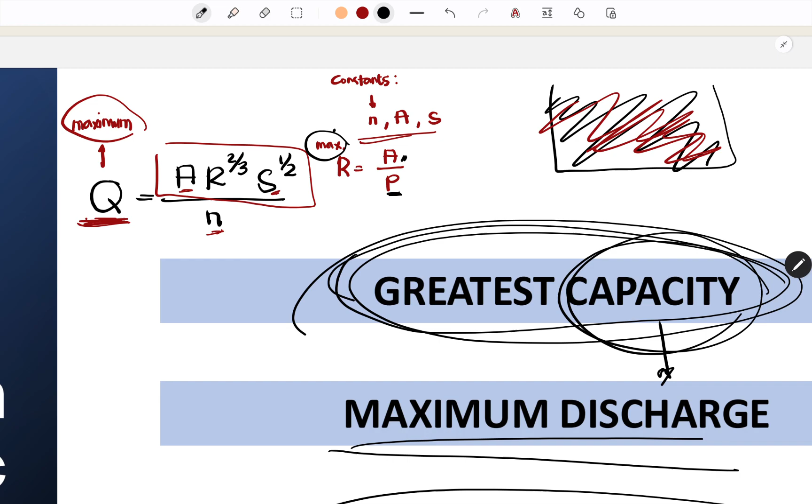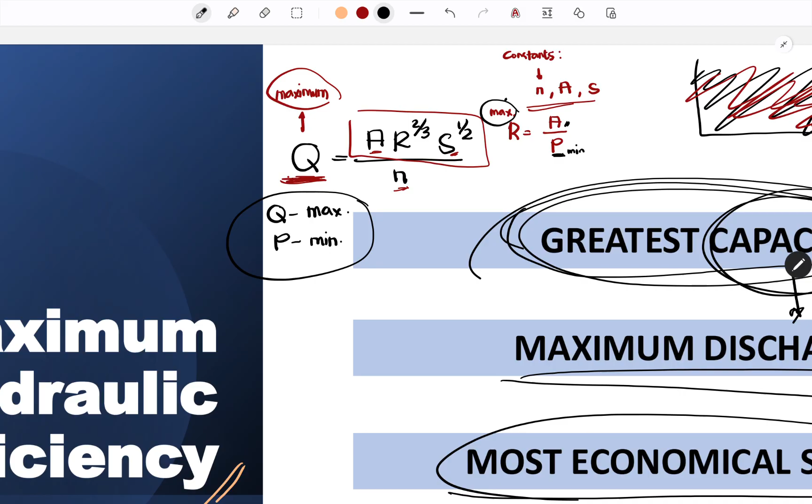Ayan yung very important part dito, na dapat yung perimeter, kung ito maximum, sabi ko nga, inversely proportional, ito naman is minimum. So, sa efficient sections, ang tatandaan lang natin, yung Q is maximum, and then yung perimeter is minimum. So, ito lang po yung tatandaan nyo dyan para sa ating efficient sections.

So, every shape ng ating channels may different efficient sections na pwede natin ma-derive from the equation. So, yan. Screenshot. Okay, next. Let's proceed with the rectangular section.

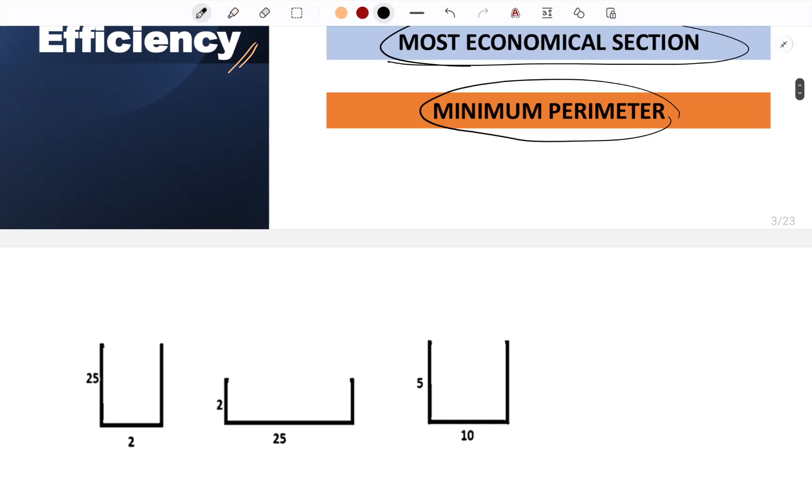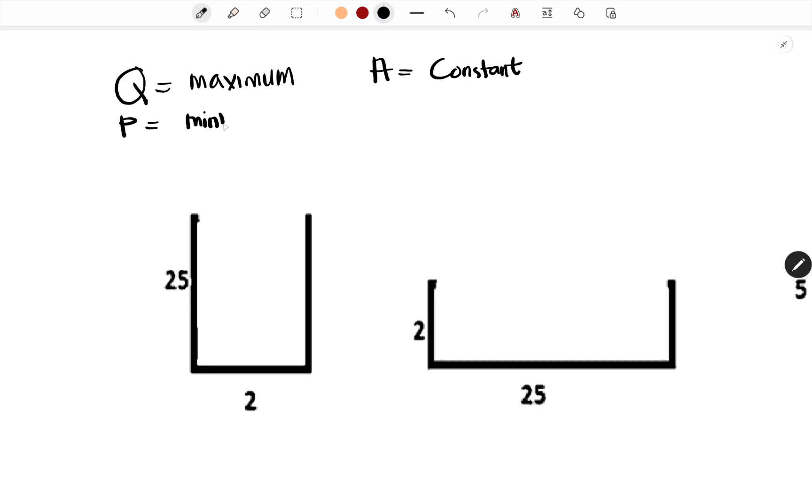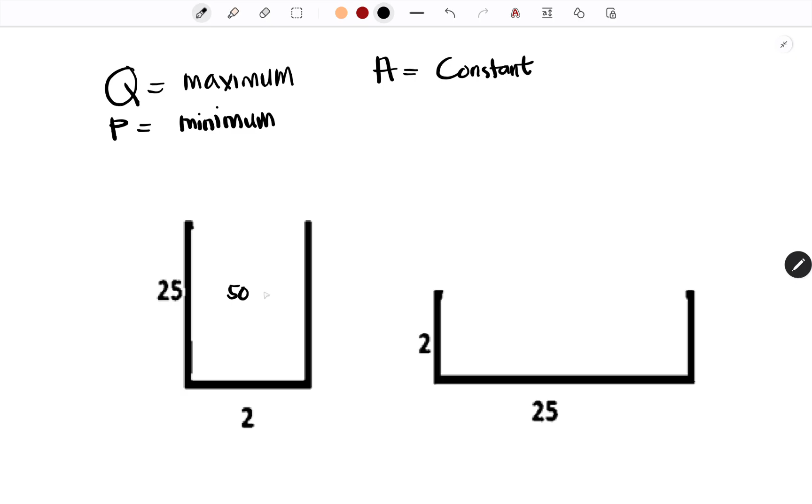So, ang sabi ko kanina, yung Q is maximum. And then, yung area is constant. But yung P is minimum. So, in this case, meron tayong dalawang example ng rectangular section na merong parehas na area since constant. So, 25 times 2, we have 50. Area of 50, let's say square meter.

So, ma-observe nyo, yung width niya dito, yung B, ito naman yung D, is 2. And yung depth niya dito is 25. So, ibig sabihin, yung area niya is 50 parehas. Pero, sabi ko nga, dapat yung Q is maximum, and then yung P is minimum. So, let's proceed first with the perimeter.

So, in this case, alin dito yung most efficient section? Papapiliin kayo, siyempre, pipiliin nyo yung minimum na P. So, i-compute muna natin. Ano yung P dito? So, yung P is 2D plus B. Ito yung P, or perimeter. So, yung 2D, we have 2 times 25, plus 2. So, this is equivalent to 52.

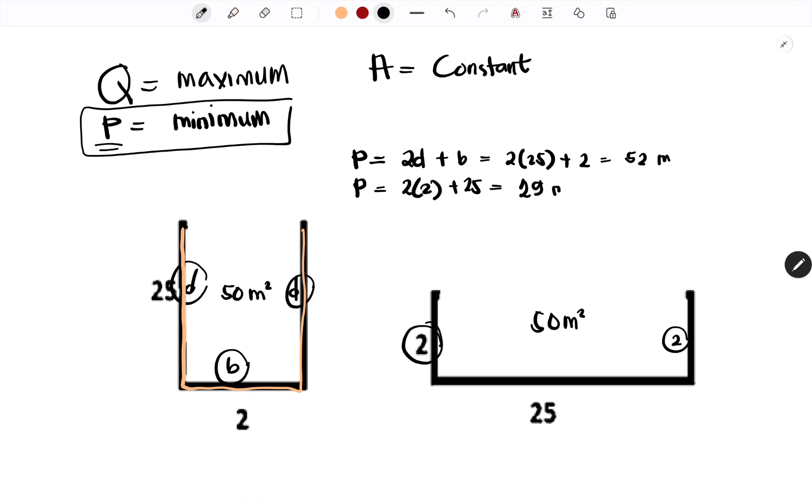Meters. Ito naman, i-solve natin para sa pangalawang P. So, meron kayong 2D, 2 times 2 plus 25. 25 plus 4, 29 meters. So, ang pagkakaiba, parehas yung area, but yung perimeter is naka-minimum. So, kung papapiliin tayo kung alin yung most efficient or most economical section, ang pipiliin po natin is ito, kasi ayan yung mas kaunting perimeter, 29 lang.

So, ibig sabihin, kung maglalatag na ng hollow blocks, naglalagay dyan ng hollow blocks, mas kaunti o mas mababa lang yung perimeter niya compared dito na mas mataas. So, yan yung pagkakaiba ng dalawa. So, of course, dito naman,

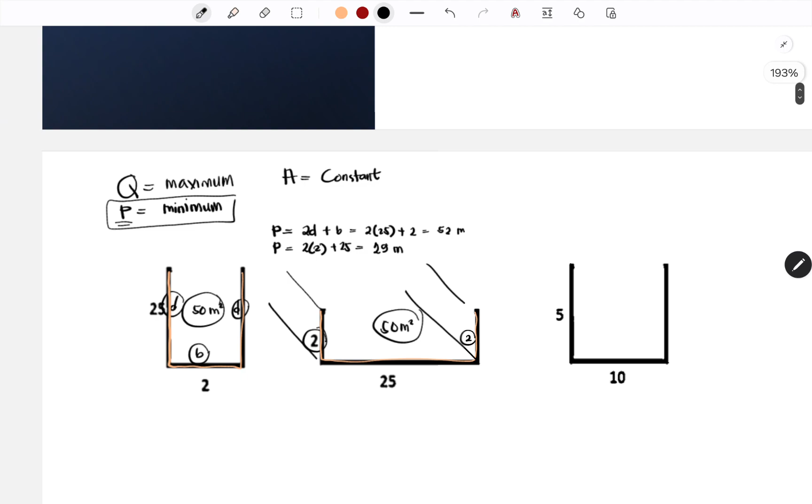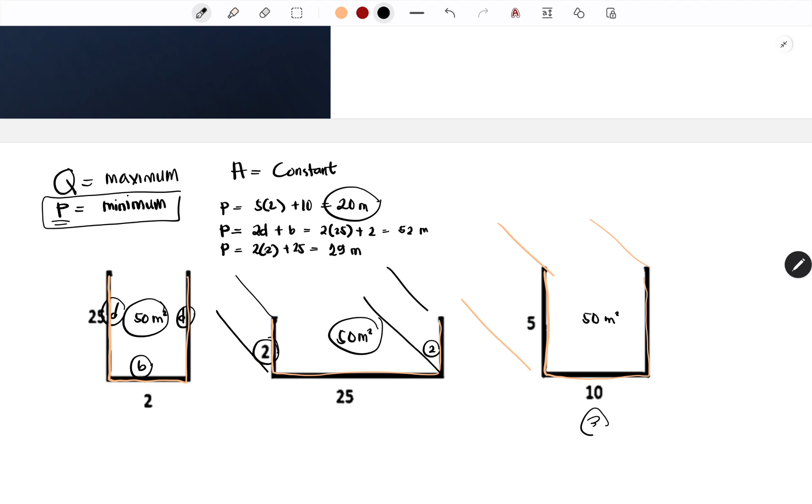ito pa pala, 5 times 10 is 50. Kalimutan ko ito. So, isa pa pala, P, 2 times 5 plus 10. So, 10 plus 10, 20. Ito pala nanalo. So, kung pagbabasehan natin yung minimum perimeter, yung pangatlo yung most efficient. I'm very sorry.

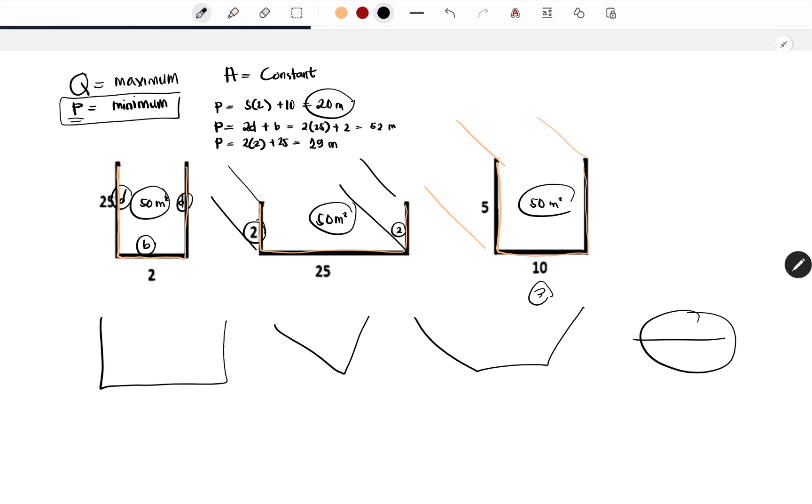So, every shape, meron tayong different efficient sections. Meron tayong apat na shape na i-consider dito: rectangular, triangular, trapezoidal, and then circle or semicircle. Ang gagawin natin, mag-derive tayo ng mga equation, and of course, ipapakita na natin yung mga equations. So, first, para sa rectangular cross-section,

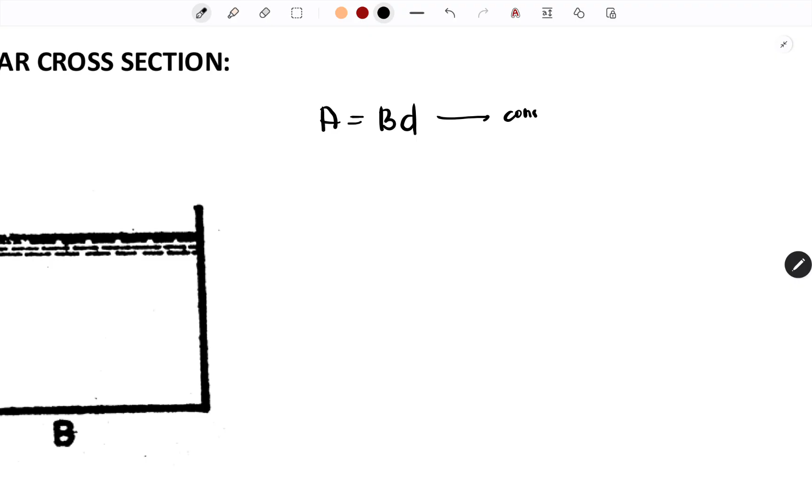sa area ng cross-section na to, we have area is equal to B times D. Pero, in our case, this is constant. So, let's try to put the equation of the perimeter. For the perimeter naman, meron tayong B plus 2D. Ito naman is dapat minimum.

So, we will apply the concept sa calculus, yung maxima and minima concept, na i-differentiate natin, tapos equate natin to 0 para makuha natin yung minimum value. Since this is the minimum, ito naman constant, ito po yung i-differentiate natin. Isang differentiation lang, tapos yung ibang shape, ibibigay ko na yung value ng minimum perimeter or hydraulic radius. Sa rectangular lang, para ma-familiarize ulit kayo. Ito yung gagamitin natin para sa maxima minima.

Ang mangyayari kasi, dalawa yung magiging variables nyo kung mag-differentiate kayo agad dito. So, gagamitin natin tong formula. Yung A is equal to BD. Kukunin natin yung value ng B na naka-in-term sa D and A. So, the B is equivalent to A over D. Yan po yung ilalagay natin dito.

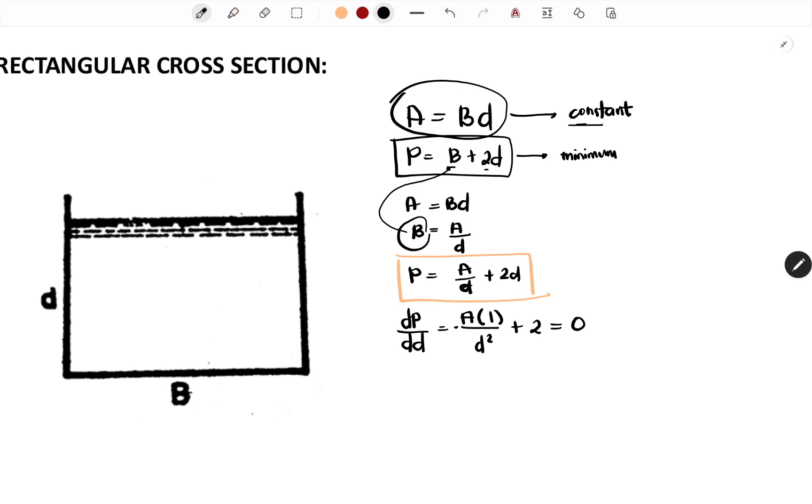So, since meron na kayong equation na to, ang gagawin natin is ililipat lang natin tong part na to dito. So, we have 2 is equivalent to A over D squared, since yung minus magiging positive. So, with that, try natin makuha yung area. Lipat natin dito sa taas. So, A is equivalent to 2D squared.

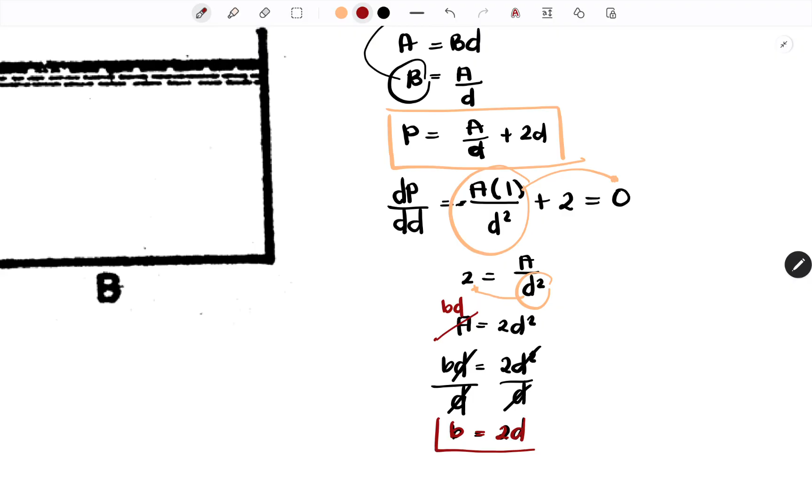And we know A is equivalent to BD. So, yung BD is equivalent to 2D squared. And then, divide both sides by D. So, B is equivalent to 2D. So, yan na yung magiging equation natin para makuha natin yung most efficient section. B is equal to 2D. So, i-substitute natin sa R.

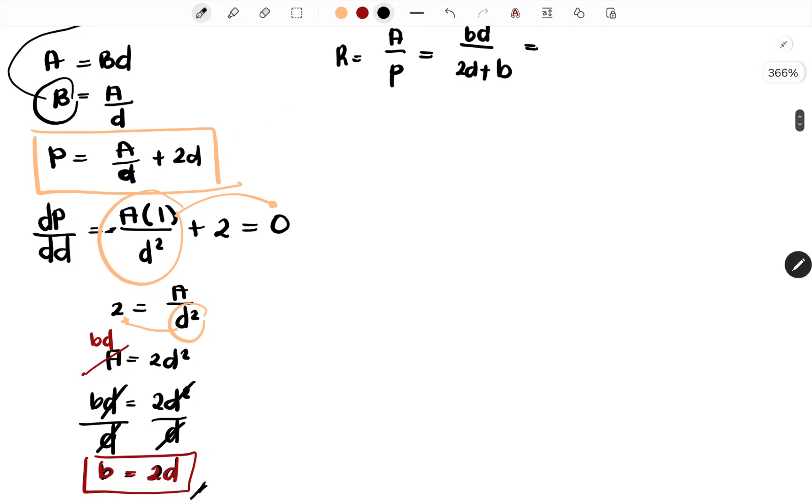So, para sa R naman, we have area over P. So, for the area, we have B times D. Yung P naman is 2D plus B. So, we know na yung B is equivalent to 2D, no? So, ilagay natin as 2D. Yung B na sinasabi ko, ito na yan. So, ilagay ko ulit as red.

2D times D over 2D plus 2D. So, 2D squared over 2D plus 2D, 4D. So, cancel natin yung dalawang D, pati yung 4 tsaka 2. Mangyayari is D over 2. So, this will be the value of the hydraulic radius kapag tinatanong yung efficient section. Diba? So, yan.

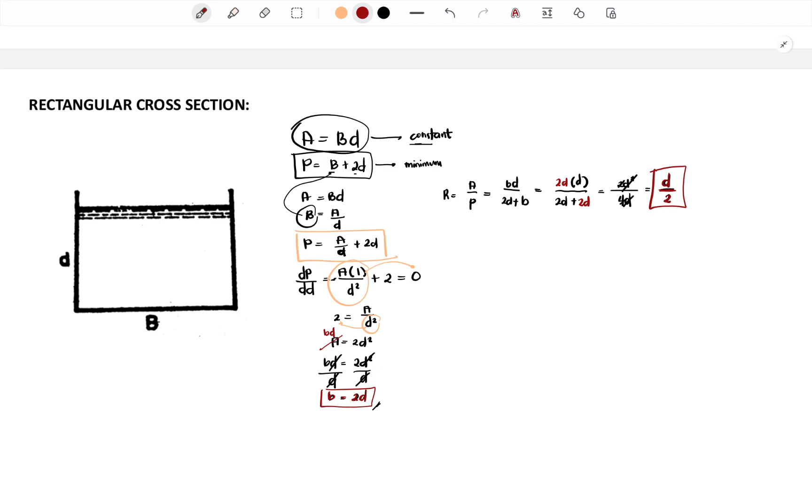So, let's start with the example. Though, naka-English unit to. So, pwede na yan. Parehas lang naman. Mababago lang yung equation natin sa Manning's. So, let's proceed.

Design the economical section of a rectangular flume. Yung flume pala is an example of open channel. That will carry the discharge of 100 cubic feet per second with an allowable drop of 4 feet per mile. So, yung allowable drop is the slope, no? 4 feet per mile daw yung slope natin. So, convert natin yung 4 feet per mile.

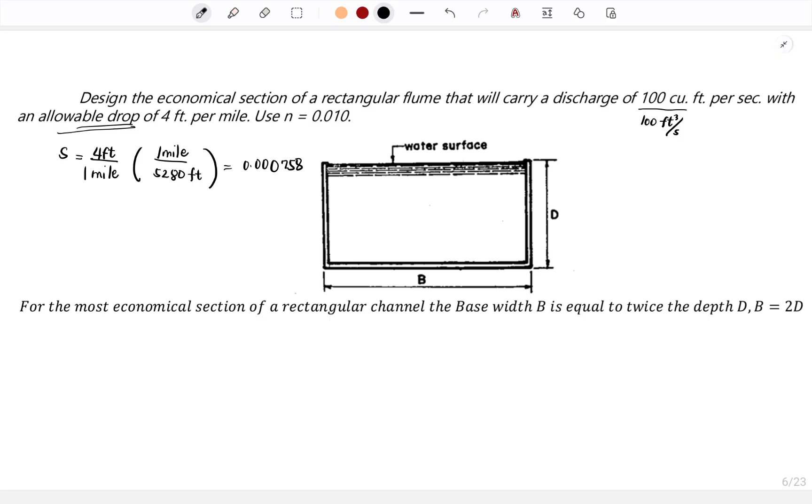Per 1 mile. So, yung 1 mile, merong ilang feet? Convert nyo na lang, 5280. Lalabas dyan sa calculators nyo. So, we can solve 4 divided by 5280, we have 0.000758. Yan yung magiging S. And then use N as 0.010.

So for the most economical section of a rectangular channel, the base width B is equal to twice the depth, or B is equal to 2D, which we derived kanina. So in this case, the area is B times D. Since B is equal to 2D, 2D times D, so magiging 2D squared. Next, perimeter.

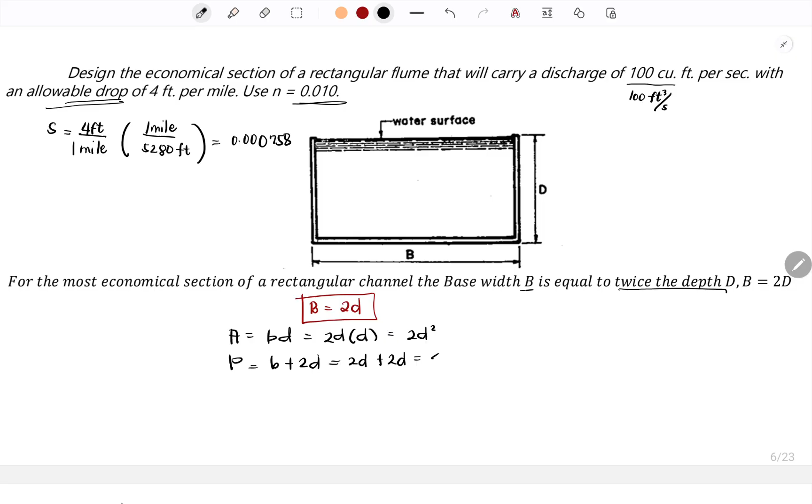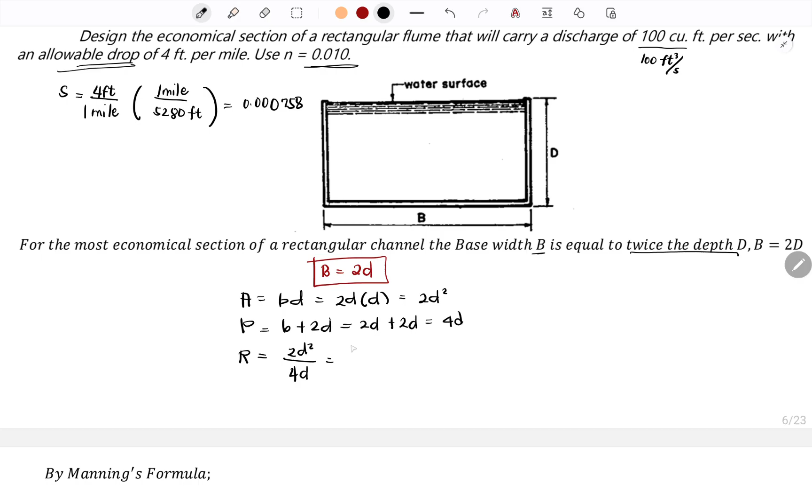B plus 2D is equal to 2D plus 2D. So we have 4D. And then for the hydraulic radius, we have 2D squared divided by 4D. So we have D over 2. Okay? So ito yung mga equation natin. And then for the S, nasolve na natin, 0.000758.

So, yan. By Manning's formula, we know na meron tayong formula of Manning. Dapat familiar na kayo dito. We have Q equals 1.486 over N, times area, R to the 2/3, S to the 1/2.

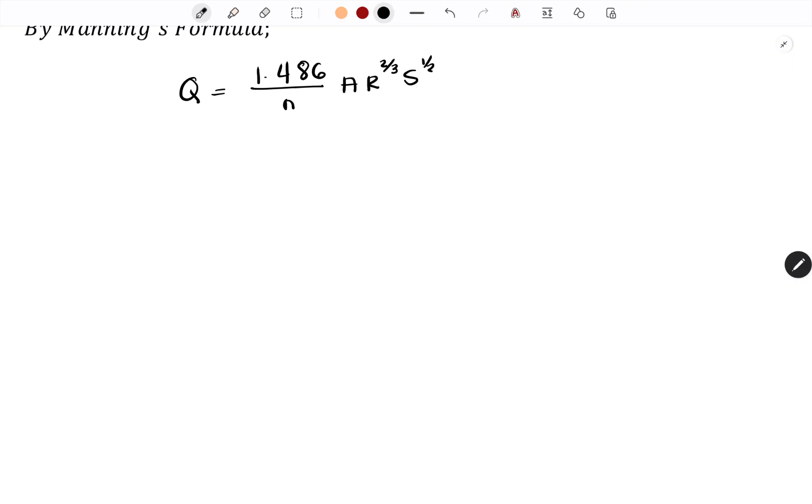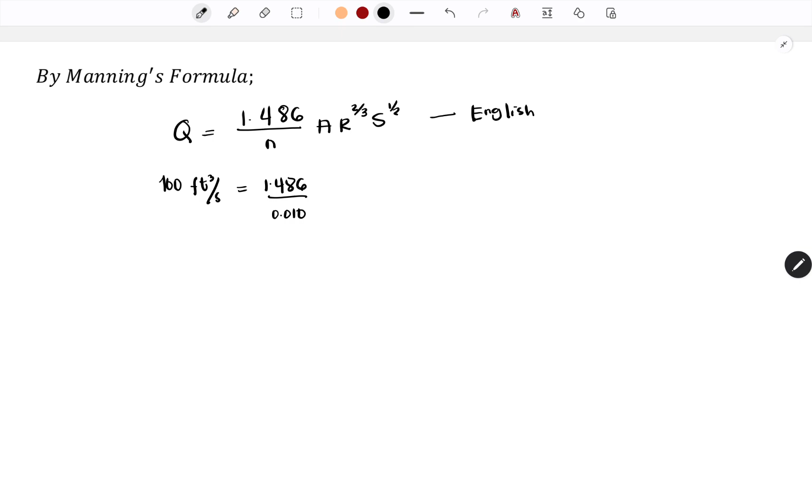So for the Q, naka-feet na to, no? So English na to. So this will be in the English version. For the Q, we have 100 cubic feet per second. And then we can just copy the 1.486. And for the N, we have 0.01. Right? For the area, we solved it earlier. This will be the area.

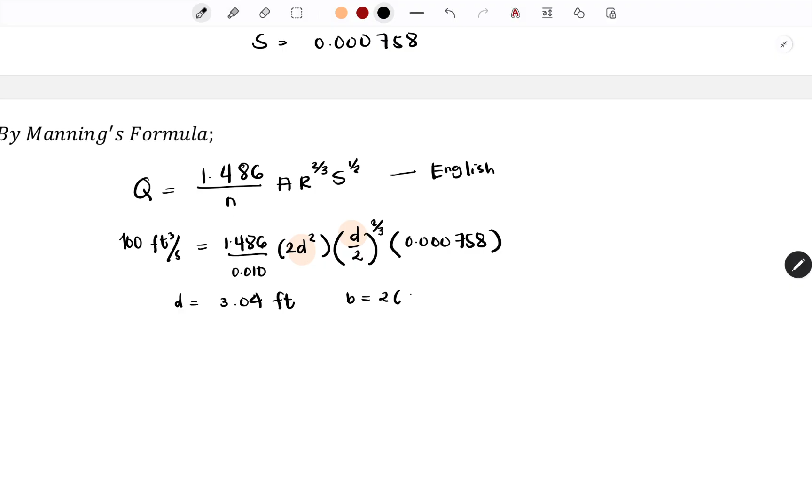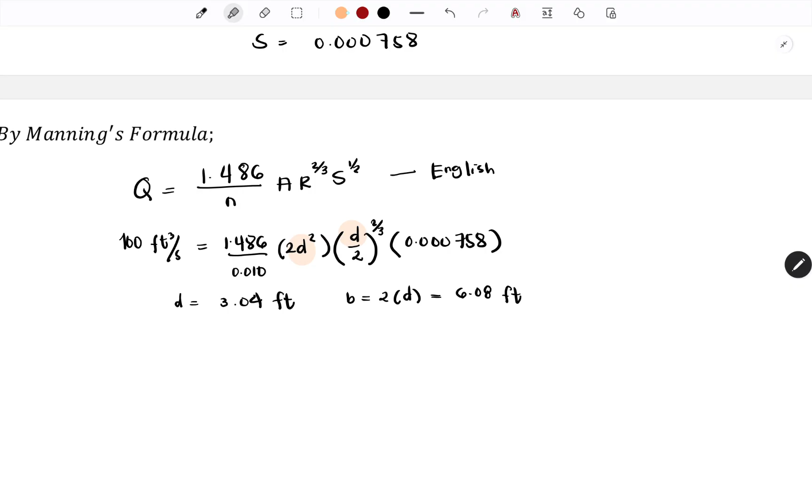So we can get the most efficient section of the flume. Solving, we get D equivalent to 3.04 feet. And then for B, 2 times D, so we have 3.04 times 2, which is 6.08 feet. So that's the answer for problem number 1.

Screenshot this. By the way, we have four shapes, so we will solve all four shapes. I'll give each shape an example.

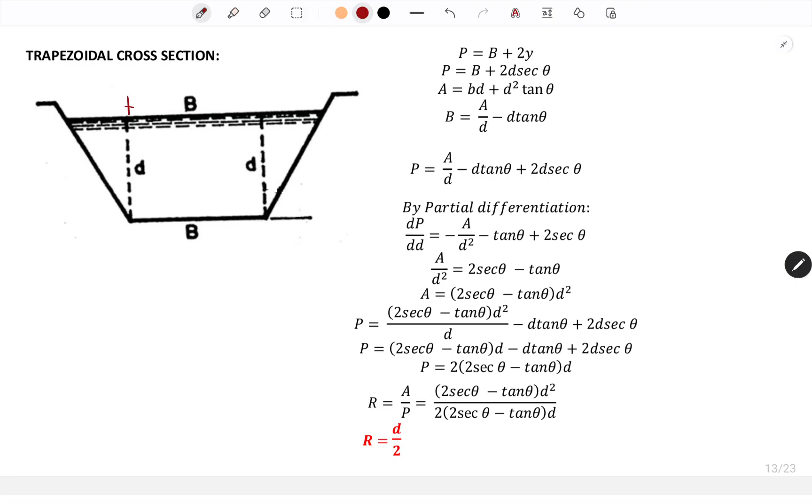Let's continue with the trapezoidal section, let's see the differentiation here. In this section, we have the width base B, same as in the quiz earlier. So we have the width base B, and then this is also B. And then we can call this d.

And then this will be the slope of the cross section, but this is different from the slope in the problem. Let's call this y. Since in the perimeter the equation is in y, and this will be the perimeter, this should be at minimum.

Let's solve for this, going quickly so our discussion moves fast. I will just point out the areas, the perimeters, and the hydraulic radius. For the perimeter, the value of y will be d secant theta, derived from the secant. But you can also solve for this, we have here the angle.

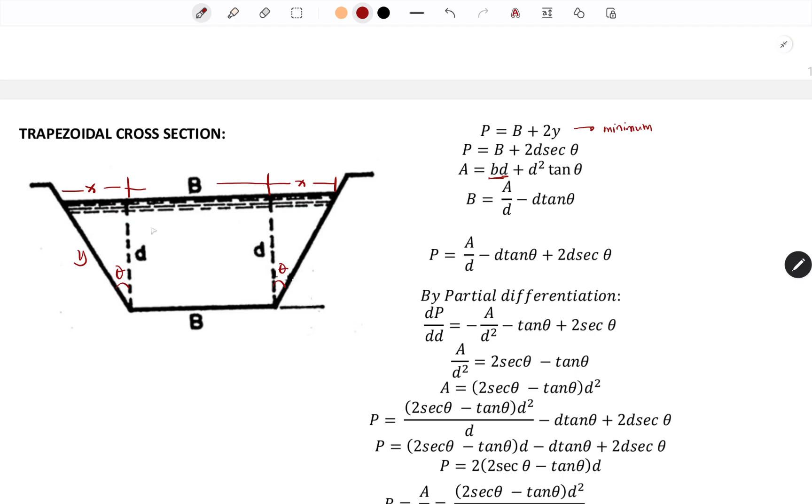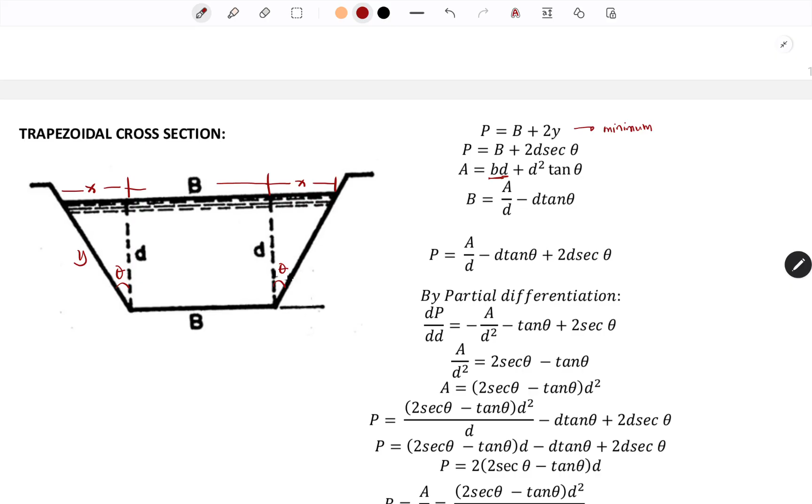So for the area, we have BD, the area of the rectangle, and then the area of the rectangle, a triangle rather. For the perimeter, the B for the rectangular part is taken from A. So this will be the equation AD, A over D minus D tan theta. And then you get the equation of the perimeter AD, etc.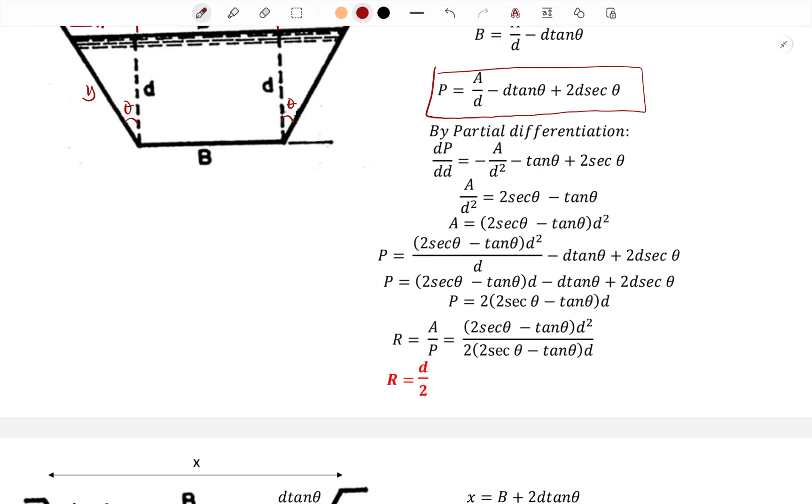By partial differentiation or maxima-minima, that will be used. So this will be the differentiation. Upon differentiation, this will be the equation of the perimeter, derived from this equation, so we won't show it again.

And then we have the hydraulic radius, which is A over P. So A over P, the P is this one here. And the area, since the area has the equation of 2 secant theta minus tangent theta, times d squared, so this will be the area.

So by this, we have the same value here, same function, so these cancel out. Cancelling, what's left is d squared over 2d. So d squared over 2d, cancelling out the d, leaves d over 2. So this will be the equation for the hydraulic radius. That's what you need to remember for the trapezoidal cross section.

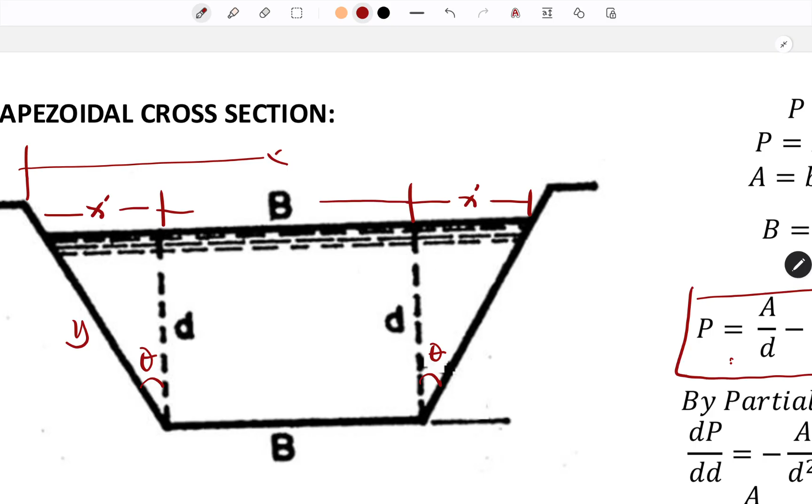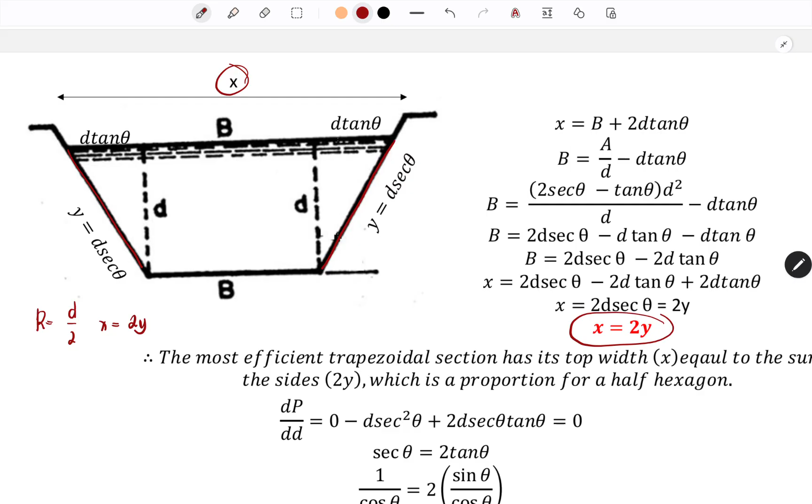So we have R is d over 2. The x, or the total width at the top, is 2y. In this case, this is the conclusion: the most efficient trapezoidal section has its top width equal to the sum of the sides, 2y, which is a proportion for a half hexagon. So a half hexagon is the shape of our cross section. So in other words, this is the trapezoid.

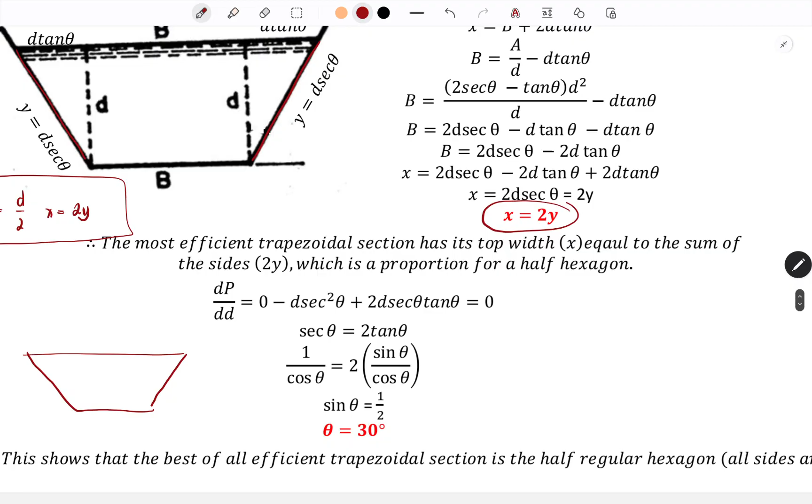And then you can see that the angle is 30 degrees, so yes, all sides are equal, and this is the half regular hexagon. So let's proceed with the example.

So, medyo tiring kasi yung mga differentiations na yun. And at the same time, di nyo naman maintindihan, diba?

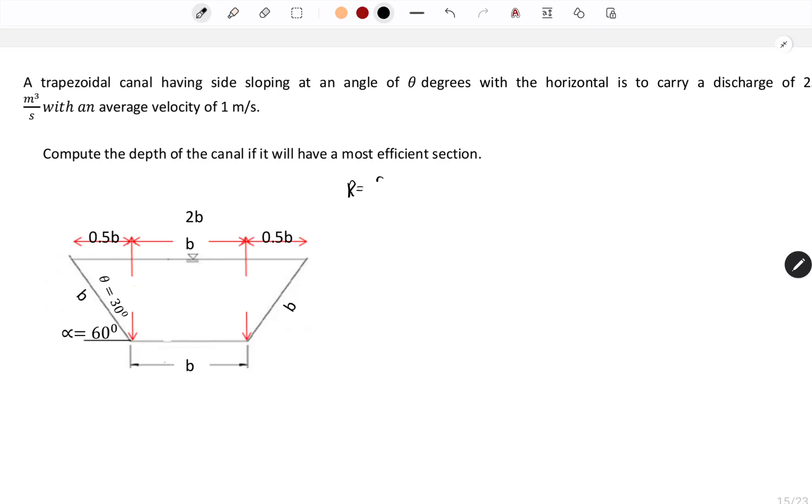A trapezoidal canal having sides sloping at an angle of theta with the horizontal is to carry a discharge of 25 cubic meters per second with an average velocity of 1 meter per second. Compute the depth of the canal if it will have a most efficient section. So kapag most efficient section, automatic, kapag may sinabing ganun, gagamitin natin na R is D over 2. And then for the value of X, that is equivalent to 2Y.

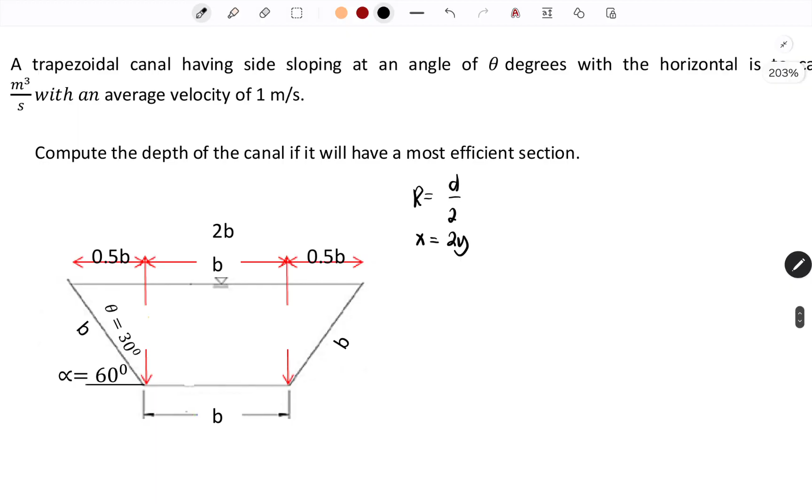Pero may binigay na figure pala. Ito. Pero ito yung magiging gagamitin natin. So let's write the givens. We have the Q, 25, and for the V we have 1.

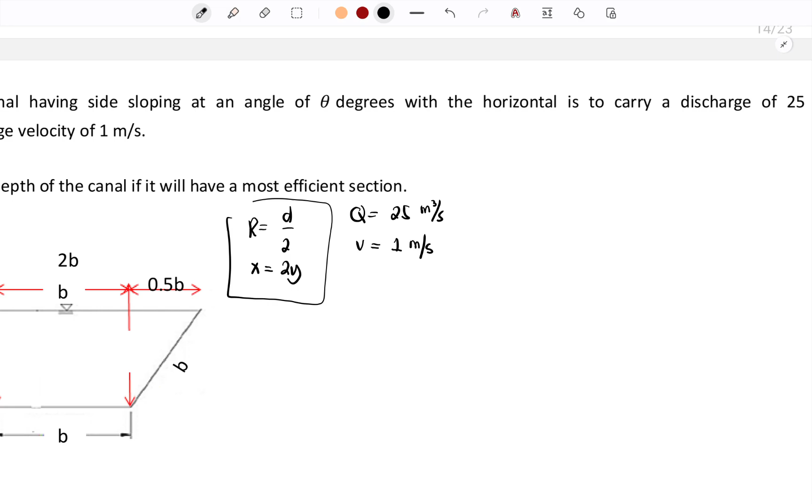So sa figure, makikita natin naka-efficient section na siya, kasi meron ng 30 degrees at the same time ito B na siya. So all side is equal. Kung ito is B, itong dalawa na to, 0.5B, kaya naging siyang 2B. Or kanina, this will be X, and ito naman yung Y. So same, Y plus Y, 2B, or 2Y or X. Tingin lang tayo dito sa figure. Ganito na yung gagawin yung figure, especially kapag solve kayo ng trapezoidal.

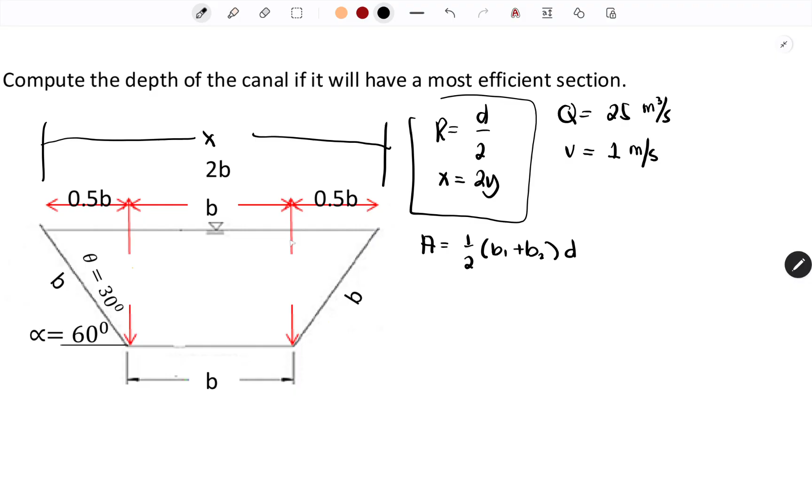So let's write the area. The area of the trapezoid, we have 1/2 times base 1 plus base 2, times the depth. So this will be the depth. Pero unknown yung mga value na yan, meron lang tayong mga variables for that. Pero let's write. So for the area, pwede natin ma-solve yung area actually, galing dito sa discharge and then the velocity.

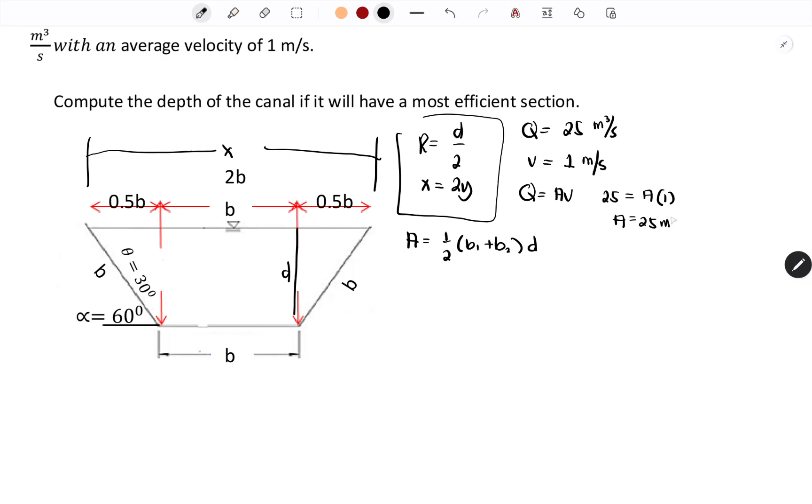For the area, we have Q = AV. 25 divided, is equal to area times 1. So the area will be 25. Lagyan natin as 25.

Then 1/2, for base 1, ito yung base 1 natin, let's write it as B, plus base 2, we have X or 2B, and for the depth, lagay lang natin as D muna. So mangyari, simplify natin, we have B plus 2B, this will be 3B, right? And then D. So 25 is equal to 1/2 times 3B times D.

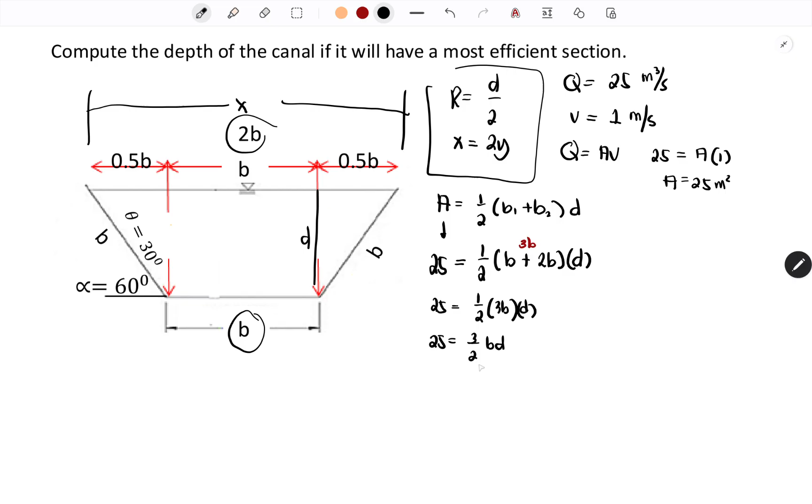So 1/2 times 3, 3/2, 25 is equivalent to 3/2 BD. And then kunin natin tong value ng BD: 25 times 2, 50 over 3. So the value of BD is 50 over 3. Let's write it as equation 1.

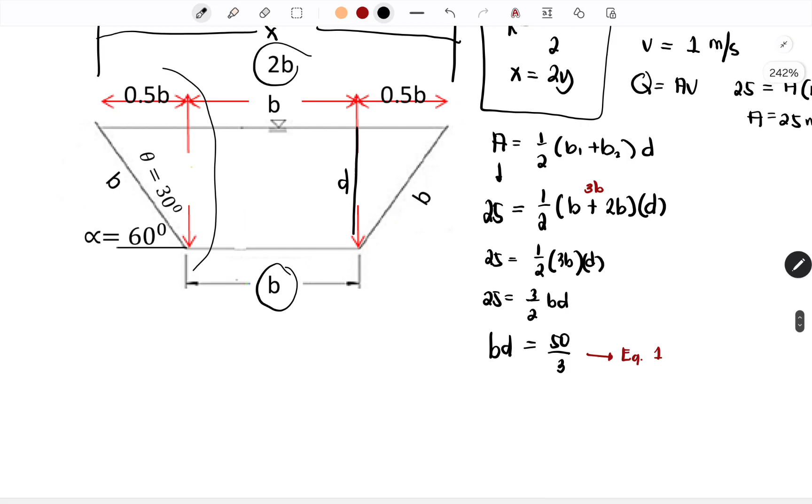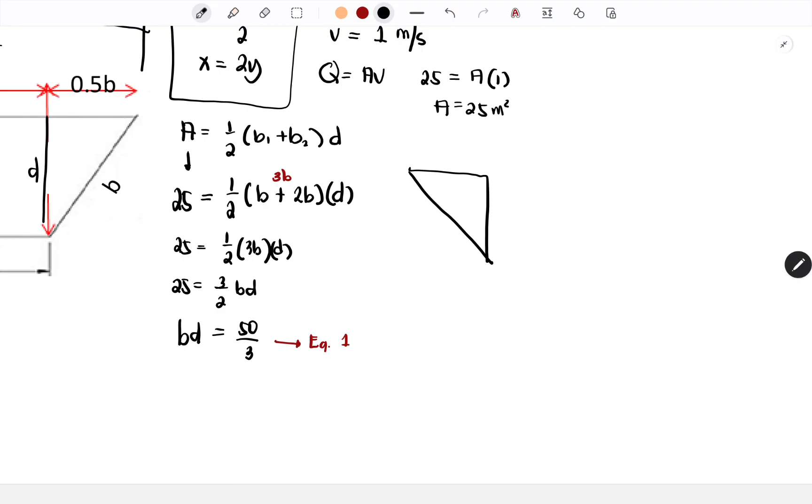So kunin natin tong part na to, this is our triangle. And then this is 30 degrees, and this will be 60 degrees. Then this will be the B also, and dito naman D, and this will be 0.5B.

So dapat makakuha tayo ng equation na merong BD. Pwede natin itong kunin, dalawa. Ito yung angle and then ito naman yung side, so ang tawag dyan is adjacent. So kapag adjacent, cosine. Let's write cosine 30.

Adjacent over the hypotenuse, D over B. Since meron kayong value ng BD, 50 over 3, lagay lang natin dito, solve natin yung D. So let's write B is equal to 50 over 3 D. So for this cosine 30, is equal to D over 50 over 3D.

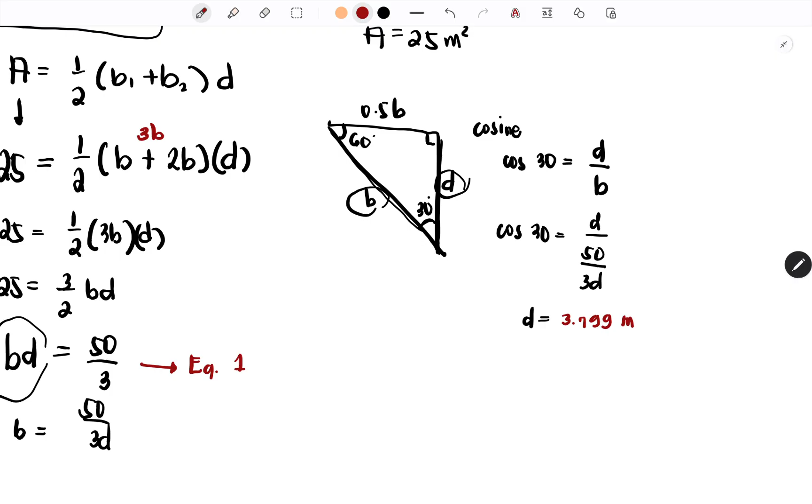So for the value of D, dalawa na lang yung unknown, D and then D, same variable na po, makasolve na tayo. So solve ko muna. We can get the value of 3.799 meters. So yan yung depth for the most efficient section.

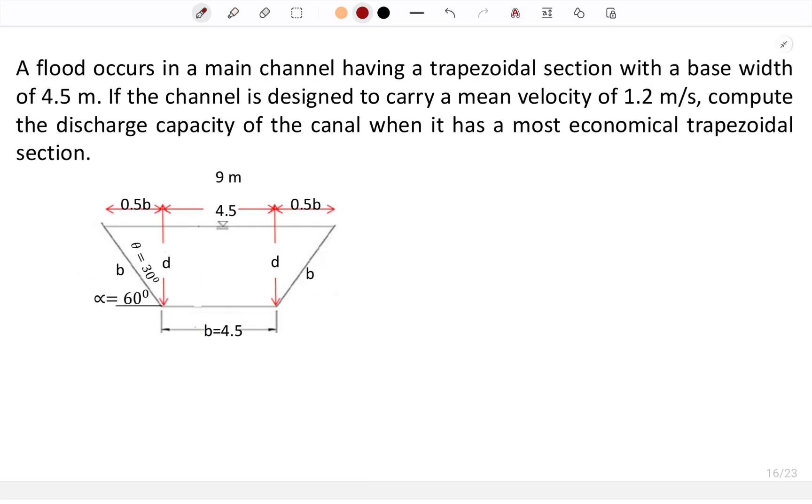Next problem: a flood occurs in the main channel having a trapezoidal section with a base width of 4.5. So given na yung mga value, ay erase ko muna to, wait lang, para matuto kayo mag-drawing. Pag drawing, kung may given na base width, this is the canal, mean velocity 1.2. Compute the discharge, so discharge yung hinahanap sa atin. So to draw the trapezoidal section, syempre, drawing na ganyan trapezoid.

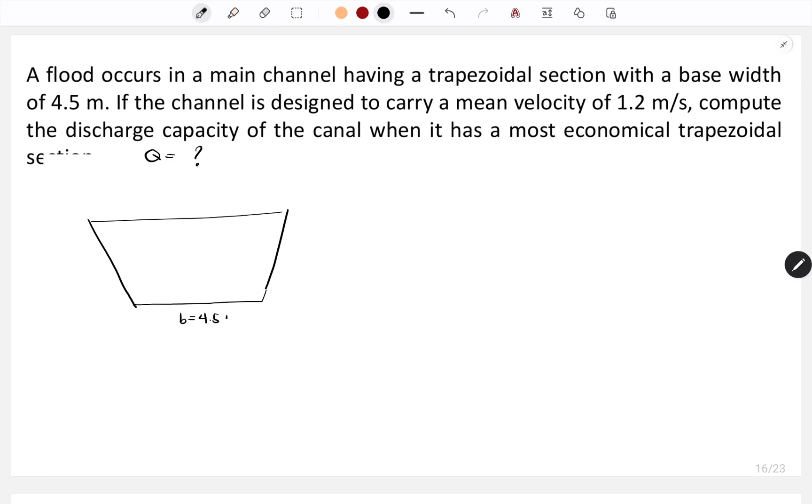Not perfect, but it's fine. So the base width is 4.5. And then what we will do is check the value of the most efficient section. Since we know the total base at the top is equivalent to this y, so 2y.

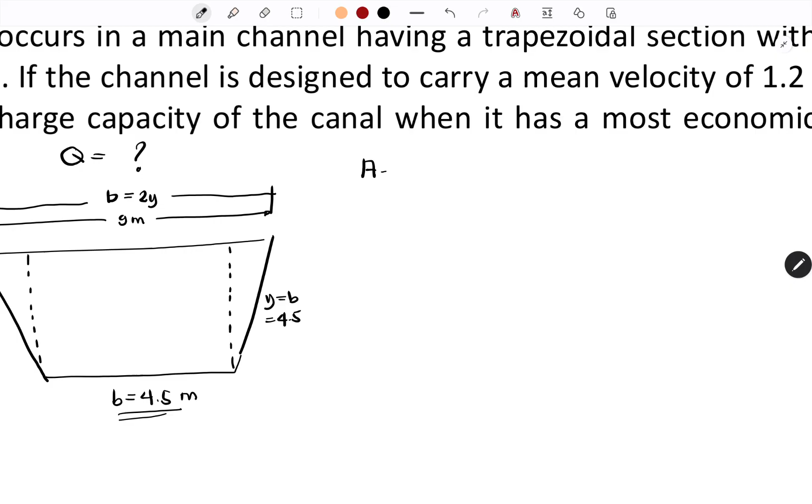So that would be the figure. First, let's solve for the area. We have 1/2 times base 1 plus base 2 times D. By the way, this will be the D. And this is 30 degrees since this is a most efficient section.

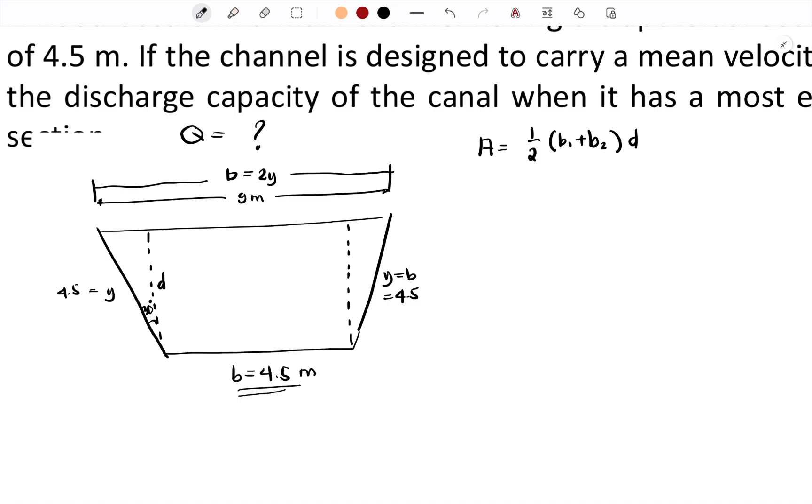Again, to solve for D, let's isolate it. We have the 4.5 meters here. Using the cosine function, cosine 30 equals adjacent over hypotenuse, so D is equivalent to 4.5 times cosine 30, which gives us 3.897.

So for the area, we have 1/2 times base one, which is 4.5, plus base 2, which is 9 meters, times the depth. This will be equivalent to 26.30 meters squared.

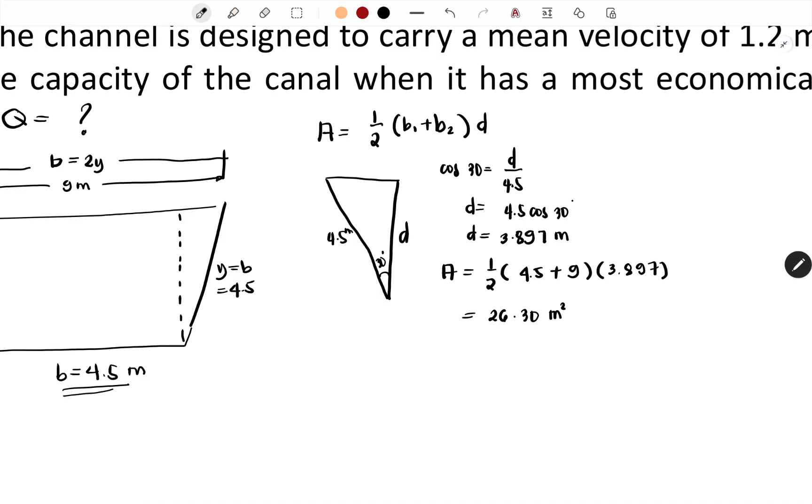And then we have the mean velocity, so we can get the value of Q for this section. Area 26.30 times the velocity 1.2. For Q, we have 31.56 cubic meters per second.

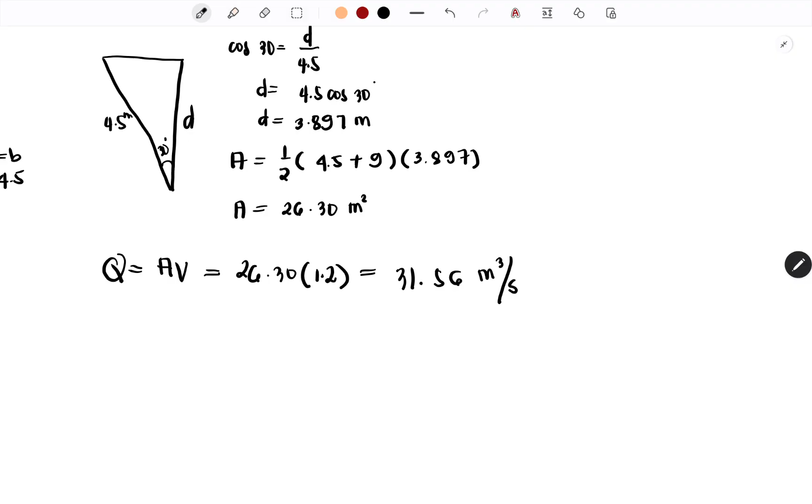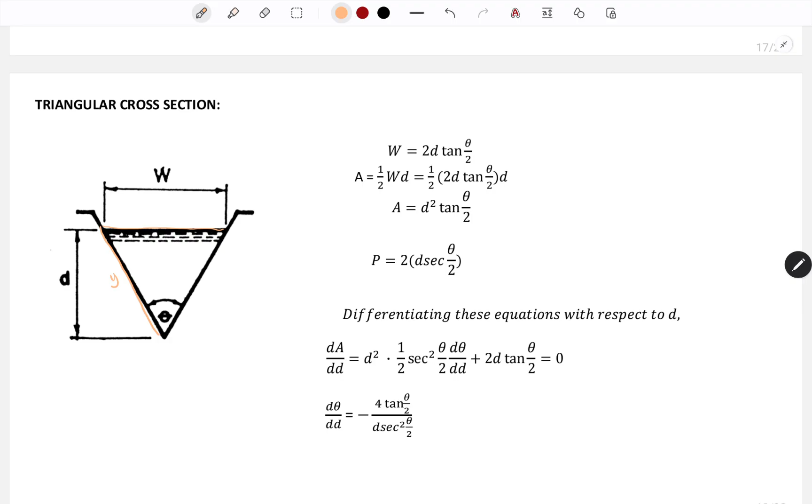Okay, let's proceed with the triangular cross section. So for the triangular cross section we have here the width, top width, and then we also have the side, and then the depth. Let's skip the differentiation. We have the value of W, which is 2D tangent theta over 2.

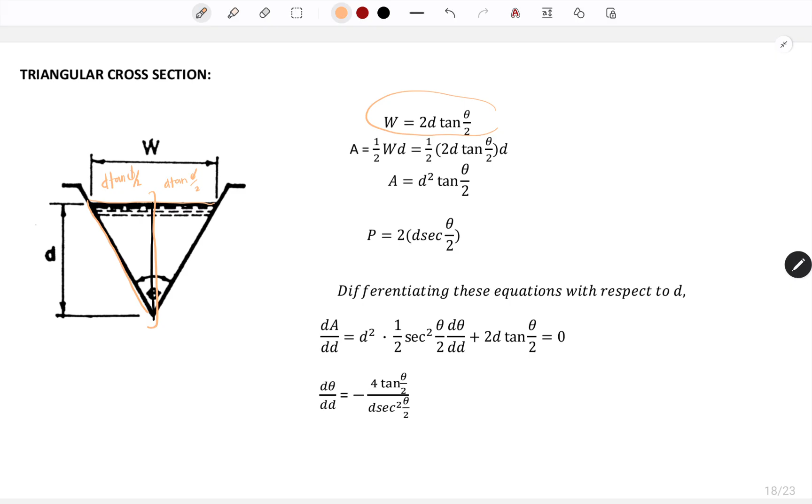So upon differentiation, we have here the theta, it will be equivalent to 90 degrees. So the drawing from earlier, the theta is equivalent to 90 degrees so we can say the section is efficient.

Most efficient section.

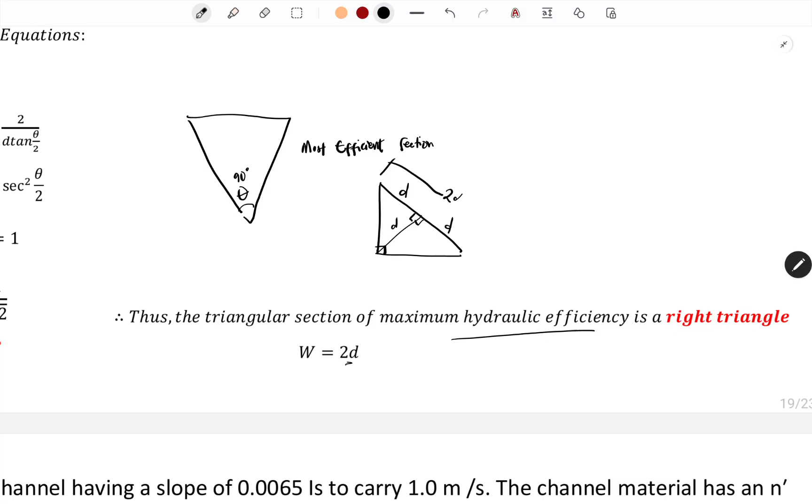So thus the triangle of maximum hydraulic efficiency is a right triangle since it has 90 degrees. So it's like this, laid out. So that means W is twice the depth. If you observe, this angle is 90 degrees. This is the depth, and this is also the depth, since it's 90 degrees. So this will be 2D, which is also this. This is D times W.

Sample: An open channel having a slope of 0.0065 is to carry 1 cubic meter per second. The channel has an N value of 0.011. For the most efficient section of a triangular section, compute the depth of the water.

So for the most efficient section, we already have theta equivalent to 90. That means, given 90, we can solve already. And also the W is equivalent to twice the depth, so we can solve for the depth now.

I think this is cubic meter. So it's not carrying Q exactly. Let's write the area of the triangular section.

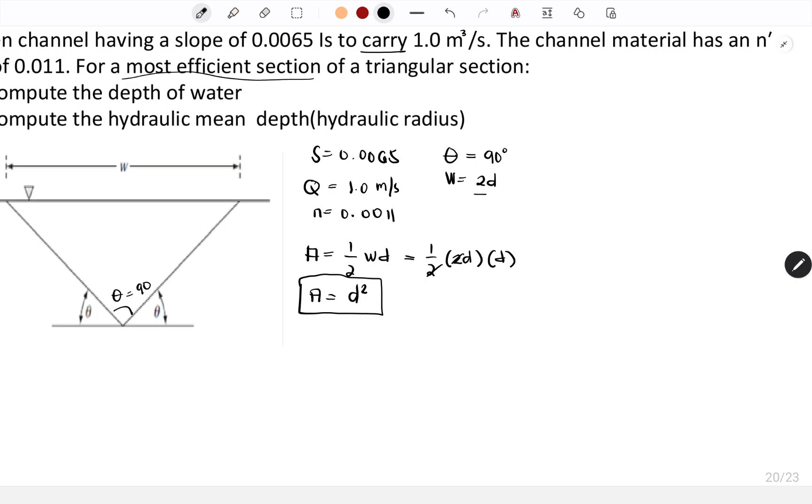So for the hydraulic radius, this is constant too, for the triangular section. For the hydraulic radius, we have the area over P. This is equivalent to D squared over 2D square root of 2. The two D's cancel out, leaving D over 2 square root of 2. So this is the hydraulic radius.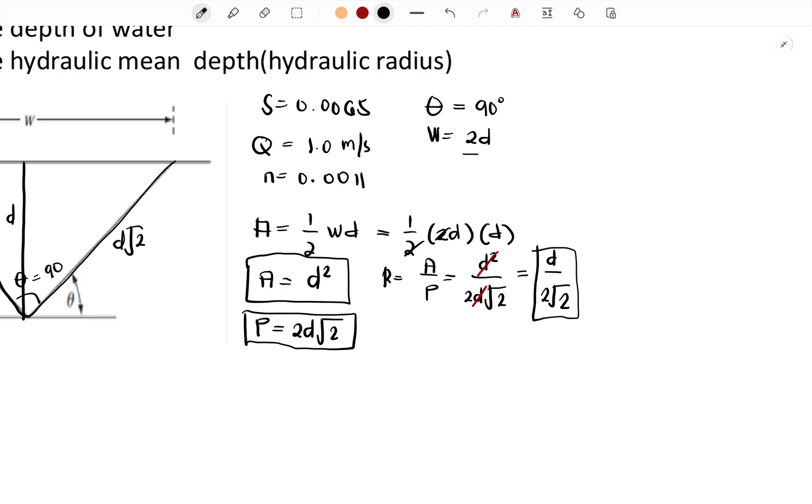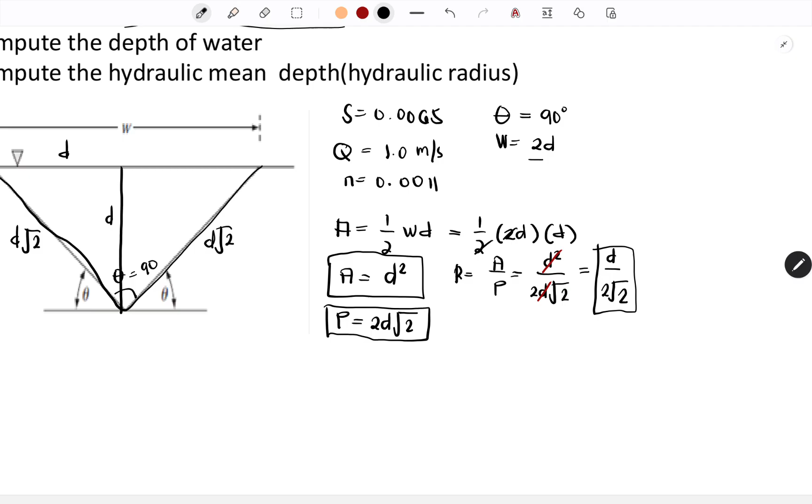So, para ma-solve natin yung hinahanap nating depth, kasi unknown yan di ba? Pero naka-base na tayo lahat sa depth para ma-solve na natin. Lagyan na natin yung equation ng Q. Wala tayong space. Which is area over N R^(2/3) S^(1/2).

So, for the Q, we have 1. For the area, we have D squared. For the N, we have 0.011. For the R, we have D over 2 square root of 2 raised to 2/3. And then, for the S, we have 0.0065 raised to 1/2. So, for this equation, we only have one unknown, which is the value of D.

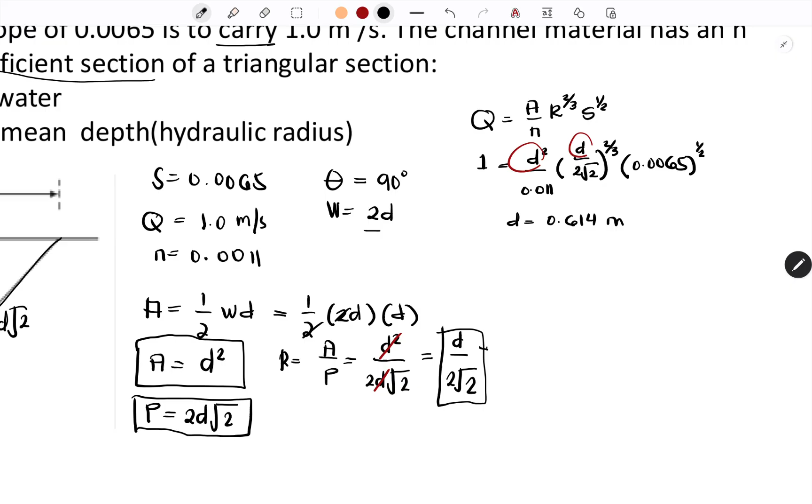So, using the shift solve command or function, the value of D is equivalent to around 0.614 meters. So, this will be the answer for the first question. For the hydraulic mean depth or hydraulic radius, gamitin lang natin tong equation na to. So for the R, D, which is 0.614 over 2 square root of 2. So we can get the value of 0.217 for the value of hydraulic radius. Yan, screenshot.

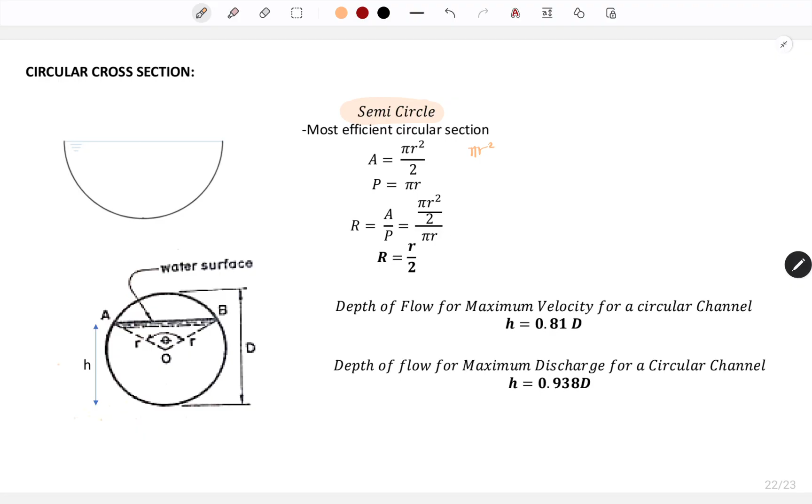Okay, for the last section, we have the circular section. Pero, yung pinaka most efficient kapag dating sa circular section is what we call the semicircle. So, walang iba na most efficient kapag circular is the semicircle. And for the area, we have this equation. Since yung area ng circle is pi r squared, so for the semicircle, divided by 2. And then, for the perimeter, we know na yung perimeter ng isang buong circle is 2 pi r. So, kung kalahati lang, semicircle, divided by 2. So, magiging pi r lang. Okay. So, wala nang ibang babaguhin dyan.

And then, for the R, we have the area, which is this, and then the perimeter. So, maka-cancel out yung isang r dito, tapos sa baba matitira and then itong pi, matitira isang r and then 2. So for the hydraulic radius, we have this equation, r over 2, or the radius divided by 2. And then ito na lang yung tandaan nyo. The depth of the flow for the maximum velocity for a circular channel: h is equivalent to 0.81 times the diameter. And then for the maximum discharge naman, h is equivalent to 0.938 diameter.

So yan, proceed tayo sa example. Ay, may solution. Erase ko lang yung solution. Open channel to be made of concrete is to be designed 1.5 cubic meter per second, slope of 0.00085. Determine the diameter for the most efficient section for semicircular section. So hanapin natin yung D or the diameter for the most efficient section. So we know na kanina meron tayong R na equivalent to the r or the radius over 2. Itong R na malaki is the hydraulic radius. Yung hydraulic radius is area over perimeter. So ito, galing yan dito. Baka kasi kalimutan nyo kagad eh.

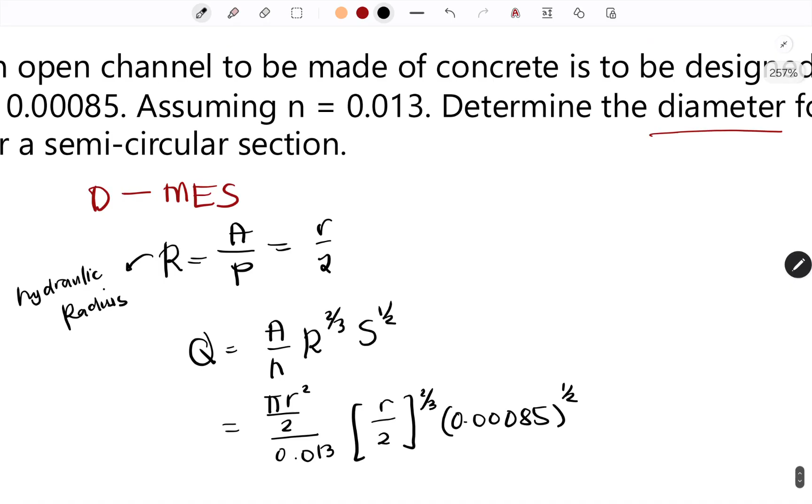So for the Q, we have the area over N, R^(2/3) S^(1/2). So for the area, we have the pi r squared over 2. And then for the N, we have 0.013. For the R, we have r over 2, raised to 2/3. For the S, we have 0.00085, raised to 1/2. For the Q, we have here the 1.5. So for this equation, we only have the r for the unknown.

So for the value of r, we have 0.863 meters. But ang tinatanong sa atin is diameter. So baka mali na kayo, may susulat nyo na, mali na kaagad kayo. For the diameter, times 2, 2r, we have 1.726 meters.

So, yan. So, that would be the discussion about the most efficient sections. So, hindi pala siya abot ng 20 minutes lang. Tinabot tayo ng around 1 hour, kasi meron tayong 4 na shapes na kailangan i-consider. So, if ever na rectangular lang, mas madali. And mas madali nga din kung semicircular section lang din, kasi you can actually do the math, geometry. So, wala na tayong babaguhin.

So, ayan. Thank you. Bigay na lang din ako ng sample problem or you can solve the problems in your workbook.